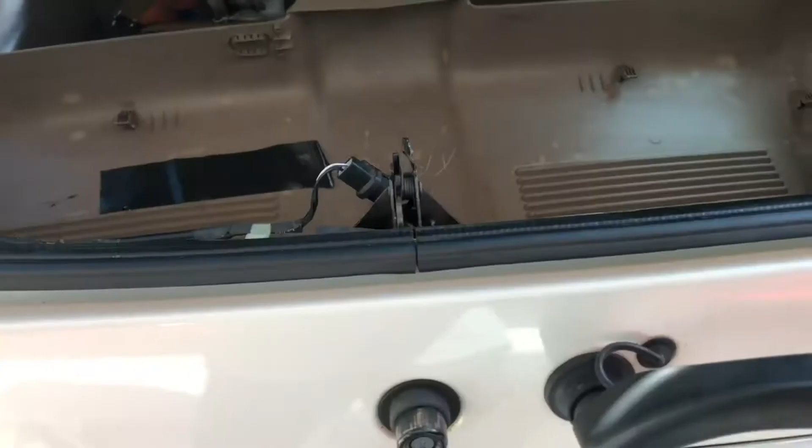This is a 2000 Ford Explorer with the rear latch. Zoom out so you can see where I'm at. And the rear latch just doesn't work at all. So what we've done, we've taken off the back piece of trim, and let me show you.

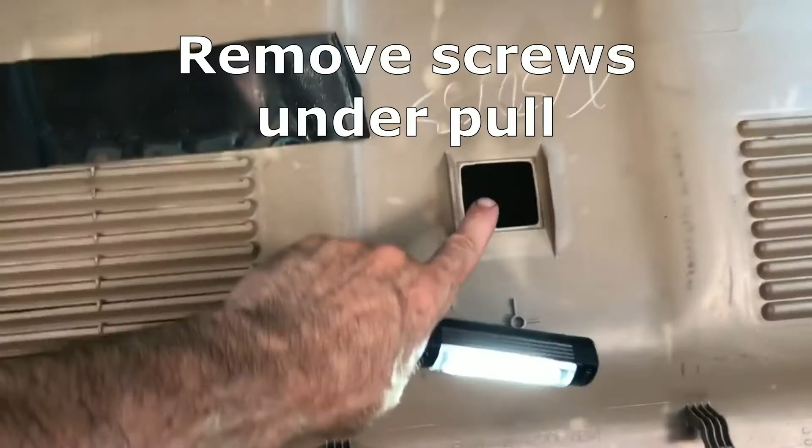There's clips in the top of it, so you can just pull the top out. Okay, and then you have to lift up. Oh, first you got to take these screws out. There's a pull, and you can see some screws on the back side of that. So you take those out, and then you lift up. So see these little guides right there. So you have to lift this up that way to get it off.

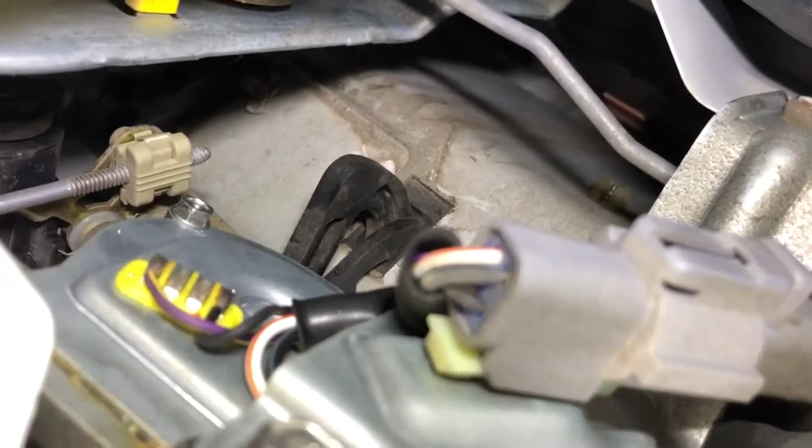Okay, so now that that is off, you expose the back. This is an upside down view of it. And okay, so now there's two sides to this thing. This is the side that's easier to see through this hole. It really doesn't focus. That one doesn't do anything, but there's a twin. The one you can see that's right in the middle of the screen. It's in focus now. That one doesn't do anything.

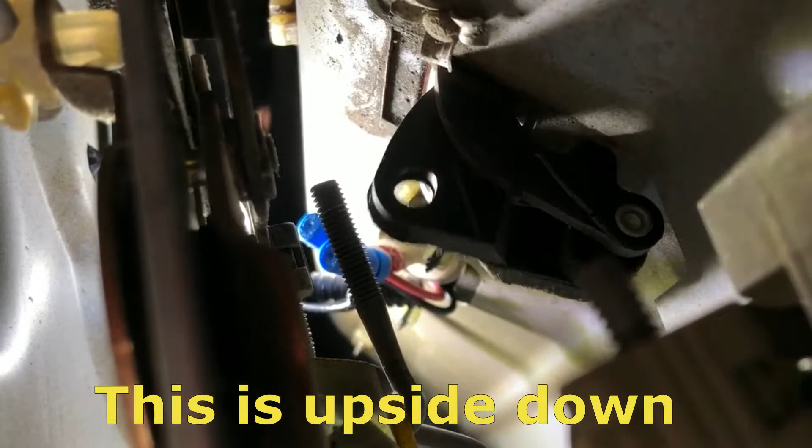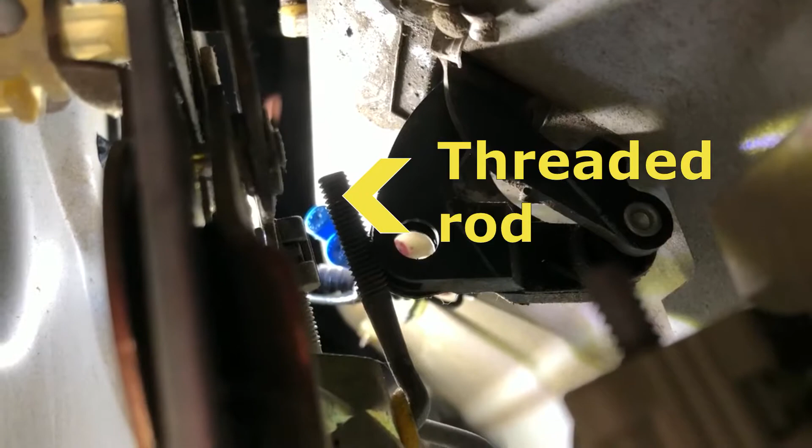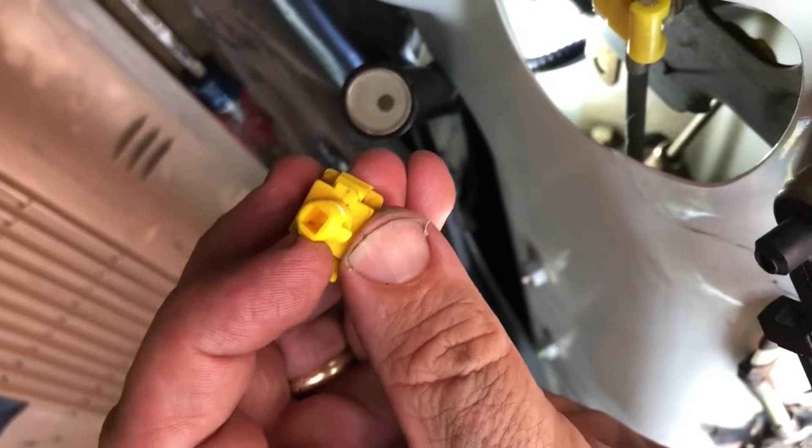The important one is on the other side, and it's right there. I'm going to try to put it mostly in the center of the screen. Aha! Okay, so that's the problem right there. Now you see right behind there, right where that black thing appears to be touching it, that is a threaded rod. Now on that threaded rod fits this piece of plastic. And the threaded rod goes right through there, and then this goes through the hole on the thing you see moving right there.

That's the pull. Okay, excuse the noise, it's really hot. I've got the fan running.

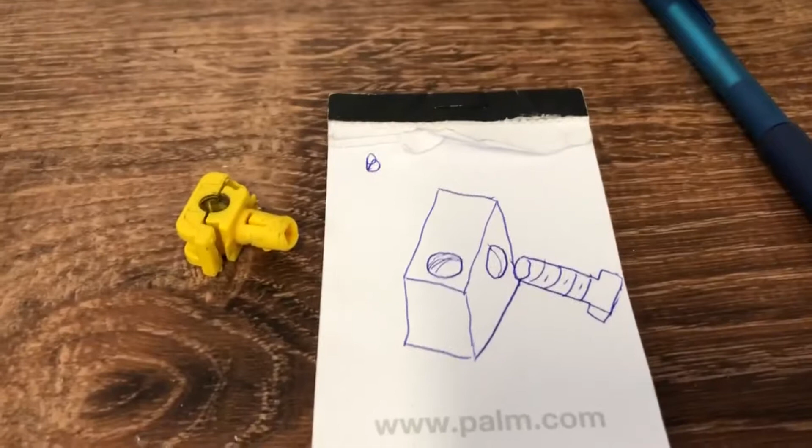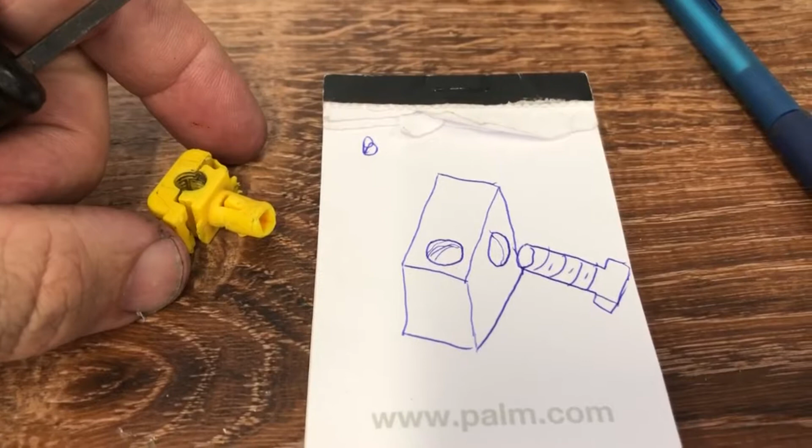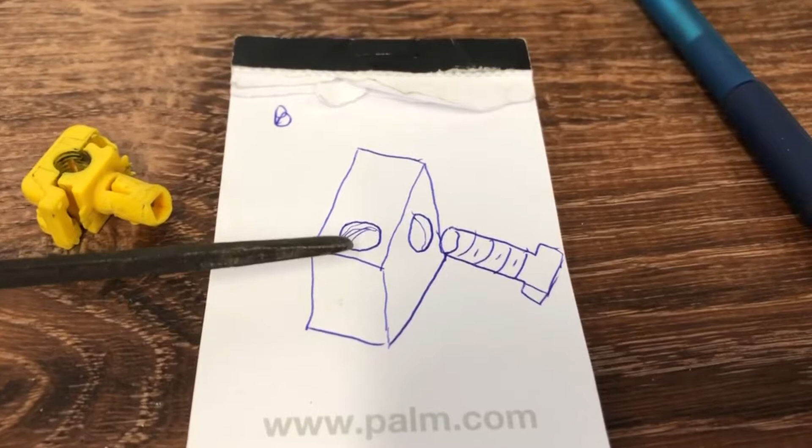So I don't think I can buy one of these from the Ford place. I think they want to sell me a lot of stuff with it, like a whole kit. So what I'm thinking about doing is just maybe making a piece like this, where this might be plastic or aluminum, and I can find out what size thread that is. That's an M6 by 1, by the way. So it's a metric 6mm, 1 thread per millimeter, pretty standard size.

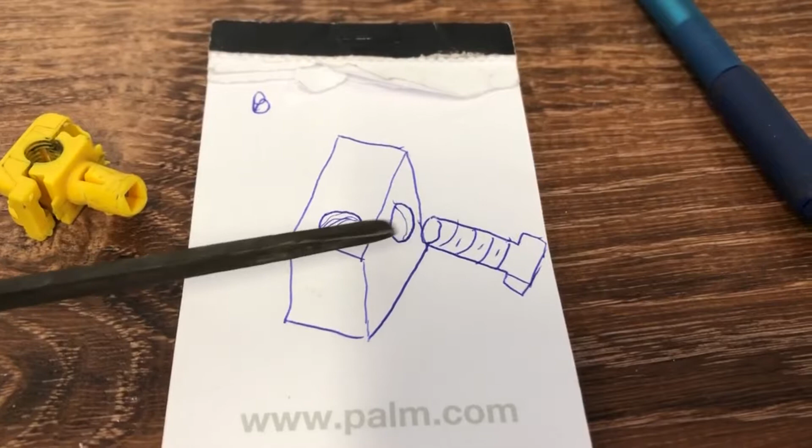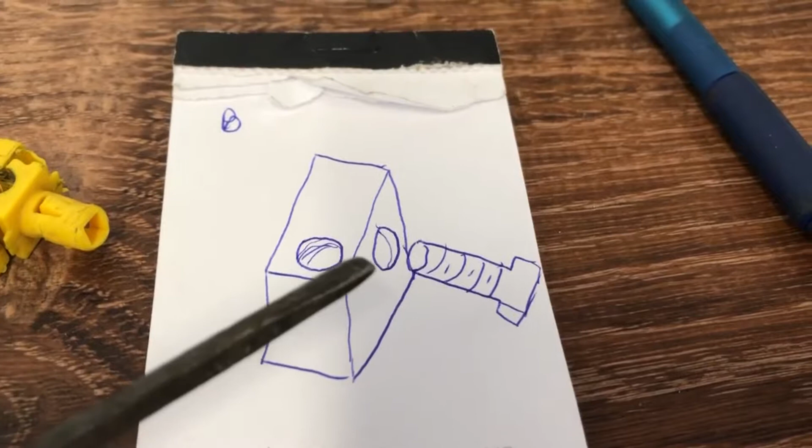And so if I get a piece of plastic, maybe I can just tap this with the M6. My hand is shaking. And then actually just use a screw to put through that black thing you saw moving, and then latch into this. There's plenty of room in there to make this part bigger than the original yellow piece. So it shouldn't be a problem.

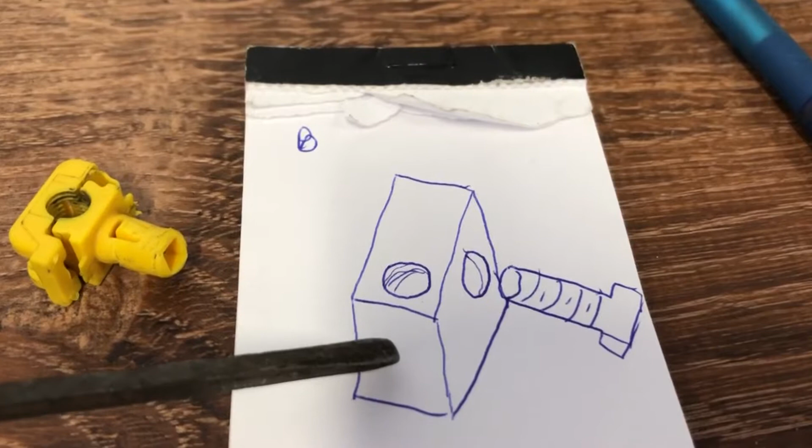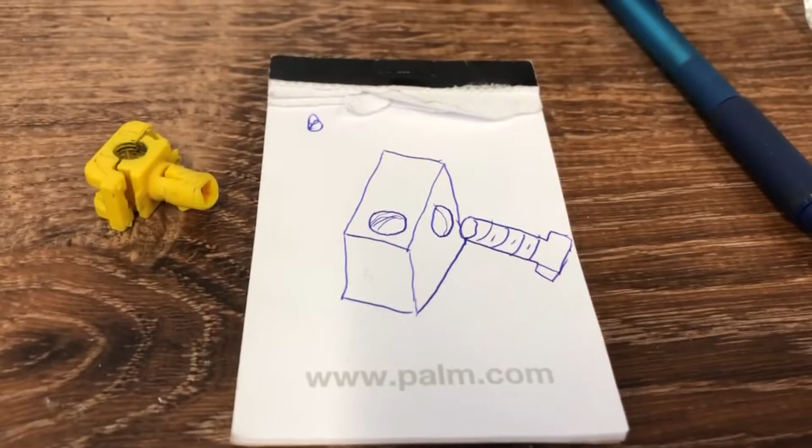I've got some plastic that would be good for this, but I don't really have a great saw to cut it. So I went to Lowe's, and I found this aluminum bar. It's not quite thick enough, but I think I can cut it and thread 2 of these together, basically to make something like this. And so what I'm going to do is basically mark off about the right length of this.

Excuse my dirty hands, I've been changing oil.

And I have a chop saw, so we can just cut this, there's no problem. And then I got a 6mm drill and tap, $8 from Lowe's. And I got some variety of stainless M6 screws, hex head, and some nuts. I'm not really sure which ones I need, but I'm pretty sure that'll do what I need to do. So I'm going to go cut these a little bit, cut off 2 pieces and see if I can stack them together, maybe screw them together and make something similar to this.

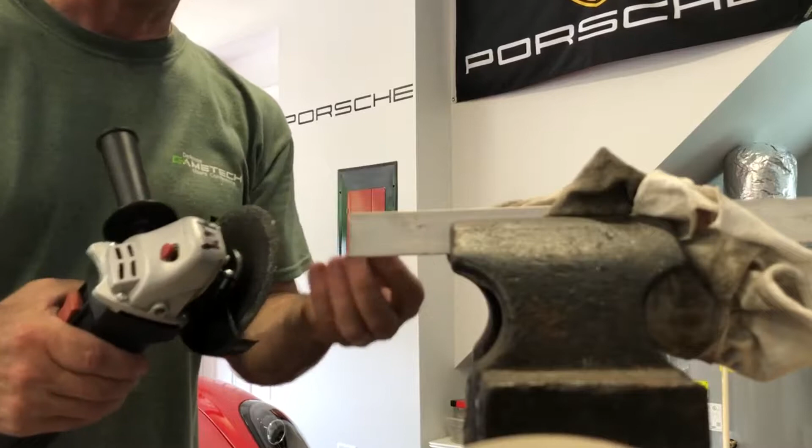So I've already cut one piece, and I'm just using a manual saw, which is not the best, but it'll do. The little bad boy is hot. We'll put it under some water, and I'll clean off the edges and sand these things down to fit together, and then we'll see what we can do with them.

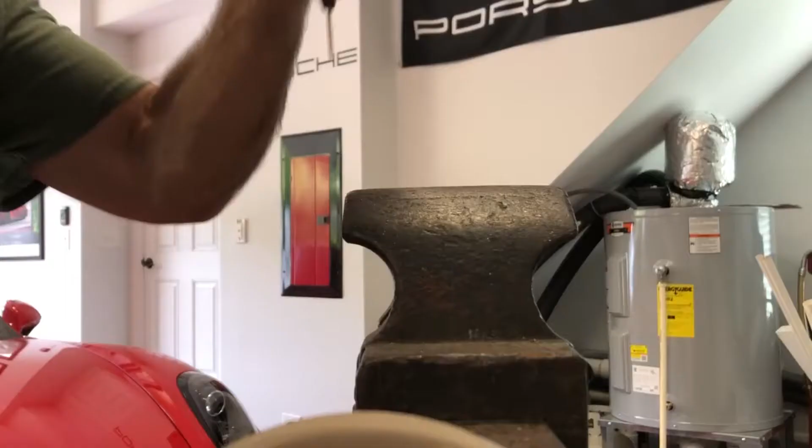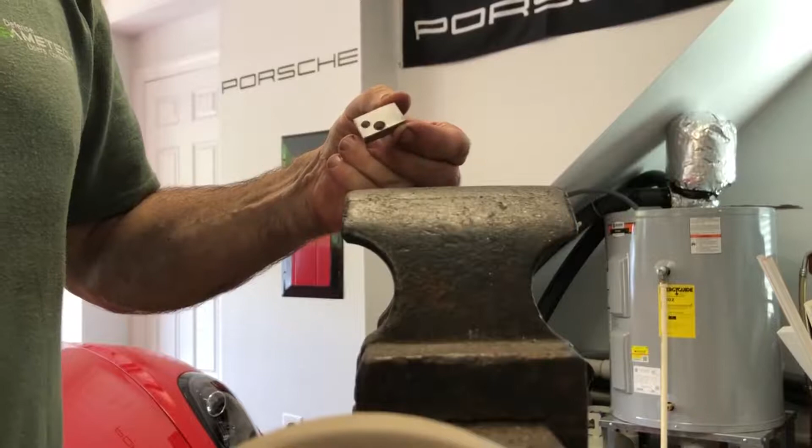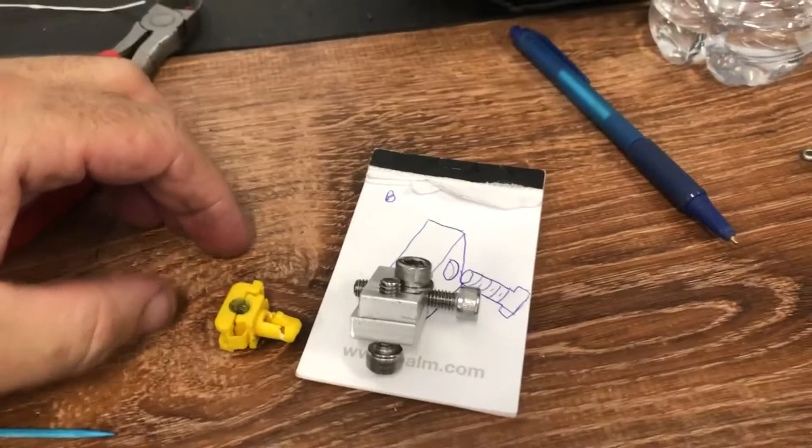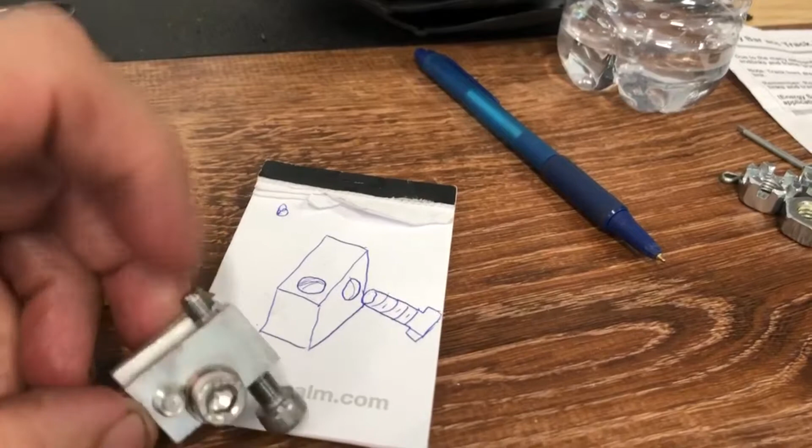Okay, so let's go over this one more time. So this is the original part, and I said I was going to make something kind of like that right there. So this is it. Now ignore this screw here, because all that's doing is holding these two blocks together. So the threaded rod in the car is going to come through here, and then this screw, I'm going to insert it through the block thing.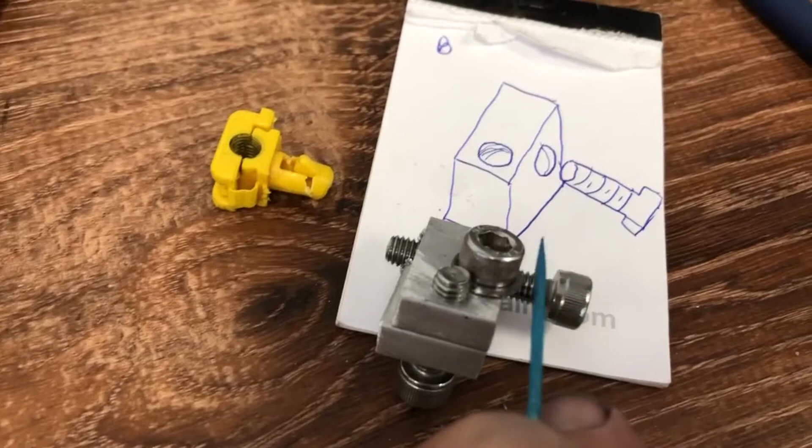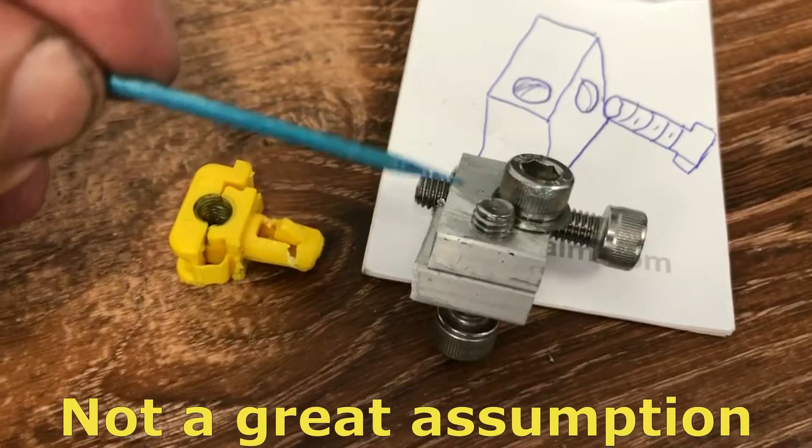So the black thing is going to be sitting right here, and so when that rod moves, then it moves the black thing as well, which is the same principle that this thing used. The rod is floppy, so I'm not really worried about the differences in dimensions here. I think there's enough slop in the system to take care of that. So let's see if it fits.

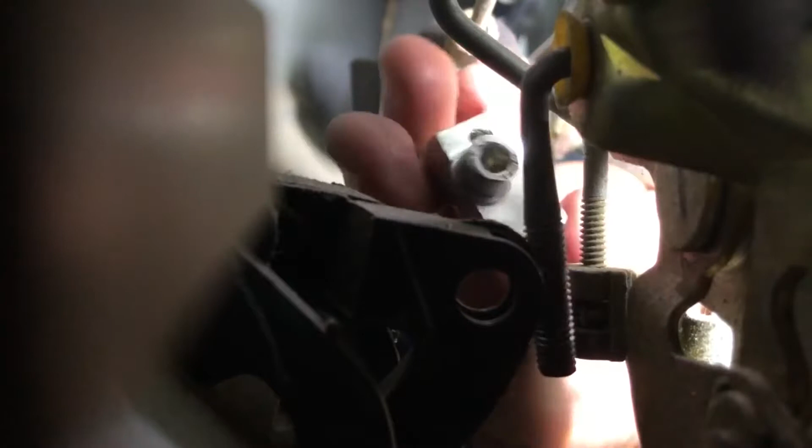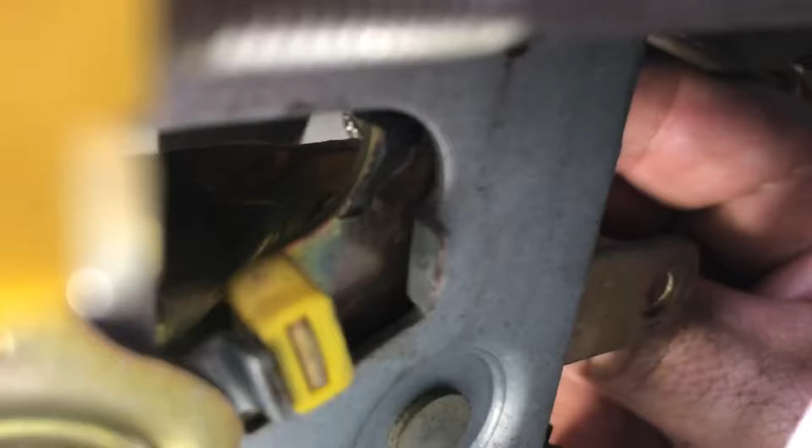A lot of things seem virtually impossible when you start to do them. Like this. I mean, with one hand, what are the chances I can thread that thing in here? But you just got to keep trying. Okay. It really wasn't hard to get it on there. I just had to get to where I could see it. Let's see.

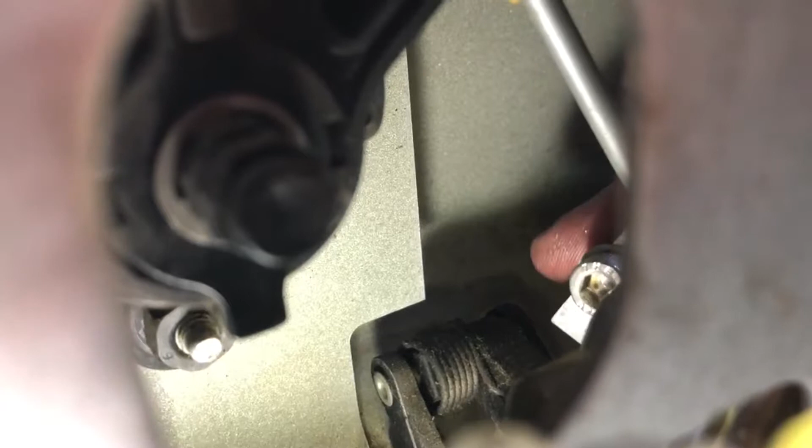Okay, so see the threaded rod? Boy, you can barely see it, but I'm turning it and it's threaded onto that rod. So I'm actually sitting on the bumper and closed the tailgate on myself. Let's see if I can see. Oh, what a beautiful angle. Oh, there it is. Okay, so it's threaded on there far enough.

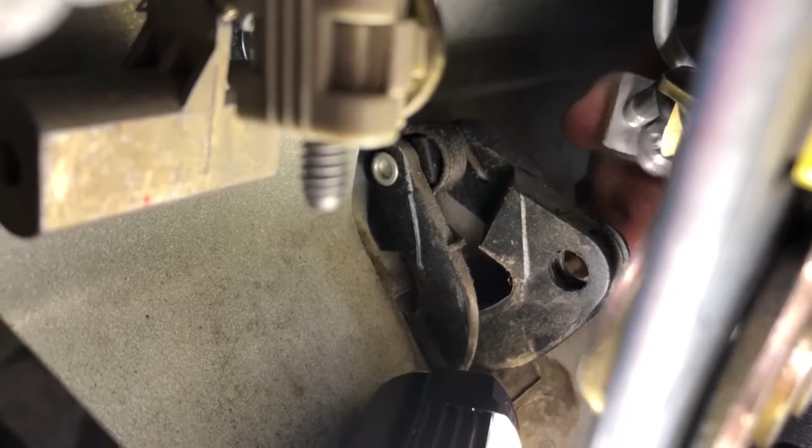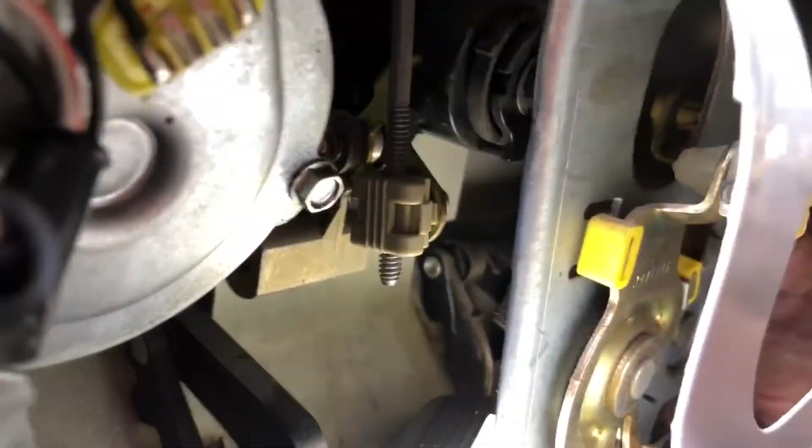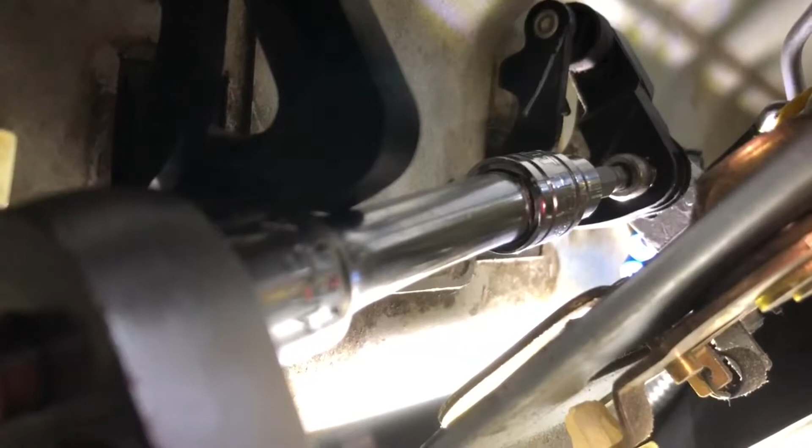And now step 2 is to get a screw through that hole my thumb is pointing to right there, and screwed into the side of this thing. Okay, I do not recommend this to anybody. This has taken way too long. I've had to rework that little piece a couple times, put more holes in it.

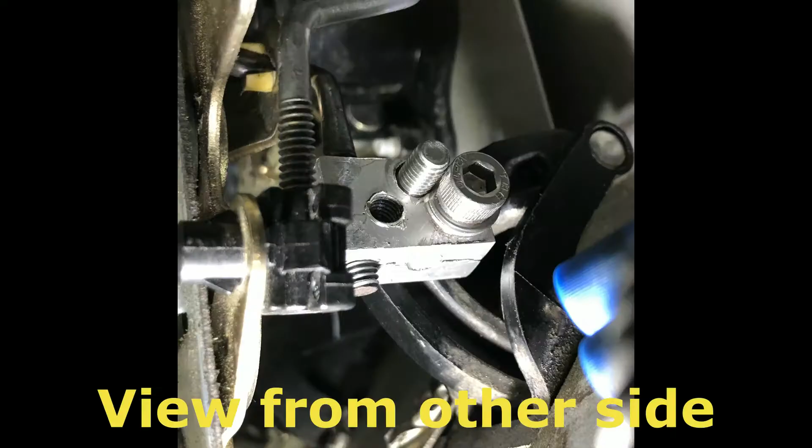Here's the threaded rod, and here's the aluminum piece, so it's going into the aluminum piece. And then I've got this Allen head screw right there, going through the black thing into that aluminum part. So it's sort of mocking up that yellow piece. I'm just going to finish tightening it up and then try it. We can check out the functionality. Seems to work pretty well.

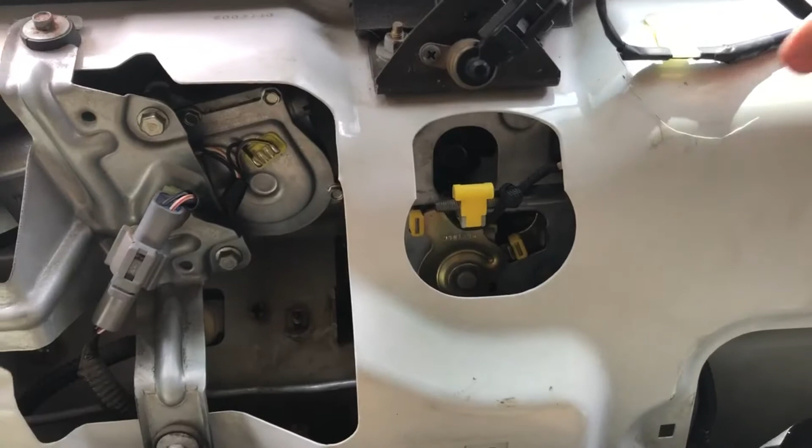One thing we did figure out, since this thing has been broken so long, if you have this window opening feature, then what you can do, if I move the camera around, here's the mechanism that opens the hatch. So if you pull the handle, that's what happens. Or if you pull the string, it also will open the door.

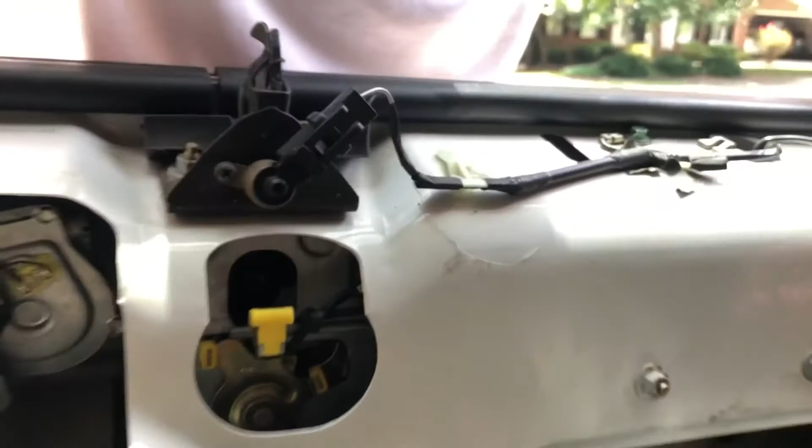So what we're going to do is cut a hole in the trim for the string to go through as a backup plan in case the little part that we just put on there fails. So we can still open the entire hatch by opening the window and then pulling on the string.

If I had it to do all over again, which I might potentially do, but not anytime soon, here's what I would do. I would go find a piece of aluminum 3/8 inch wide and get it about a 1/2 inch deep.

And the height doesn't really matter all that much. My bad assumption was that I had plenty of real estate to work with, and that I could sort of move the piece at will to line up with the hole in the latch. Well, that wasn't really all that true. So here's what I would do.

I would get this piece of aluminum about like this and drill and tap this hole in it and go ahead and screw it on without a second hole in it. And actually I did this, I didn't show it in the video, but I did this with the part I made. And just get a Sharpie or something and you can go install this thing.

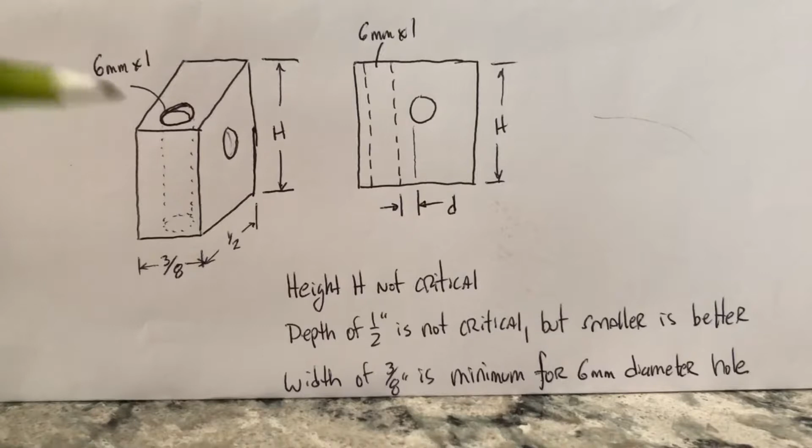So remember, the threaded rod goes through here, the rod of the car. And then just push it up against the black lever and mark on here on this back face where the hole should go. And that'll be a lot easier. And you just do it one time.

And so the 1/2 inch here, I've got some notes here. So I don't think this height is critical. I think you got a lot of space in that direction. It's not really that important. But the 1/2 inch is important because it starts getting in the way of the latch itself.

The latch, if this piece is too long, that black thing actually has a little jog in it, and this edge starts to come into play. And so you keep this about a 1/2 inch. Actually, this could be thicker as well. The 3/8 is a minimum, so it could be a 1/2 by a 1/2.

I think the only other thing is that this could be a through hole right here. So if you do that, then you can just put a screw through and put a nut on it. A lock nut or something like that would be fine. Or, since you got to tap this thing anyway, you really don't have much choice there. Just go ahead and do this one as well. And then put a screw through here and maybe put a nut on the back side.

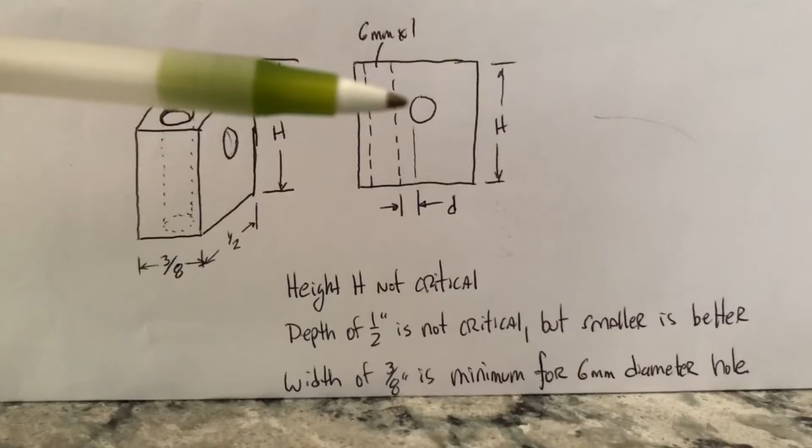If you saw the configuration, I actually had no nut on the back side because I was holding the two pieces together with another screw that was in the way. And so I ended up putting some caulk on there. Hopefully it won't back out. But if it does, I've got the string on there as plan B. So I don't think the height is critical.

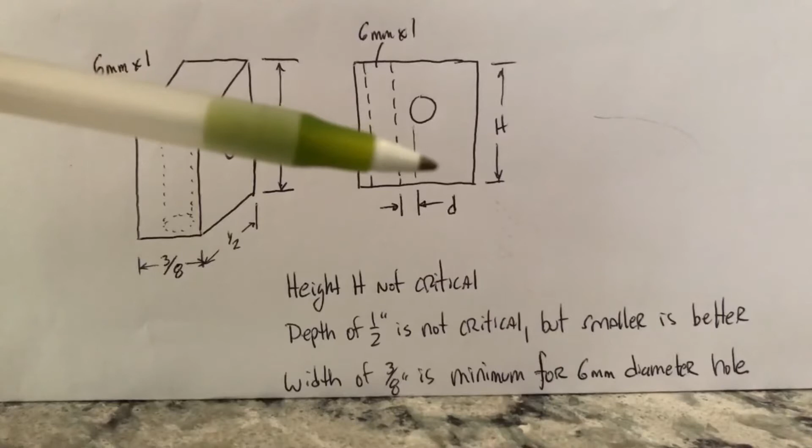If you have two pieces like I did, what I would do again is make this as long as you need it to be, and put the 1 or 2 screws somewhere down here out of the way that clamp the two pieces together. So I would use smaller ones. I'd just get like a 3mm tap or something like that.

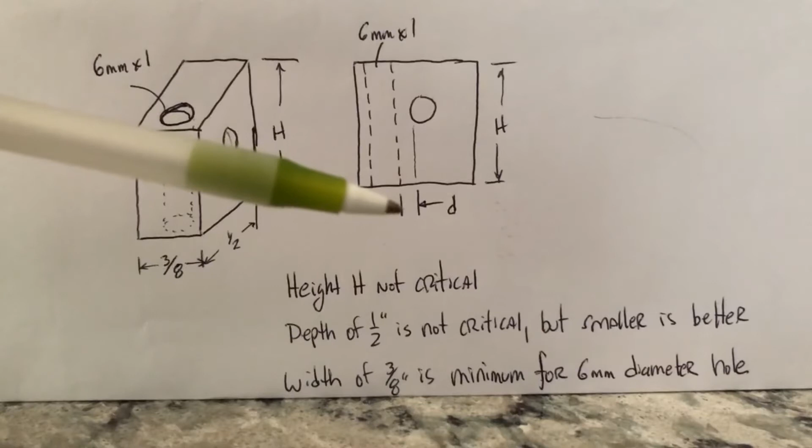It's important though that this hole not intersect this hole, these threads where the threaded rod is going to be screwed into. So you got to have some distance here, D, that's not 0. Something small would be fine. But those two things just can't intersect. So I think that about covers it all.

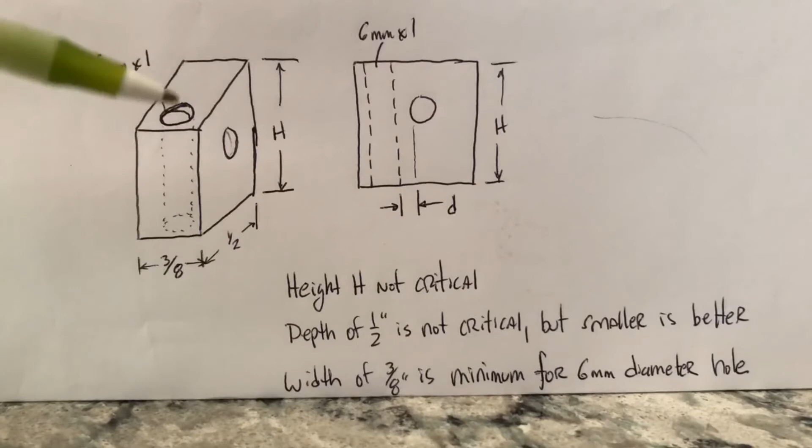So if any of you guys want to try this, definitely don't just build it and hope that it works. I would start with something like this. And actually it's not too hard. I installed and uninstalled my part on the threaded rod probably 5 times. It seems like it's going to be really hard to get going, but actually you just work it and you can get it.

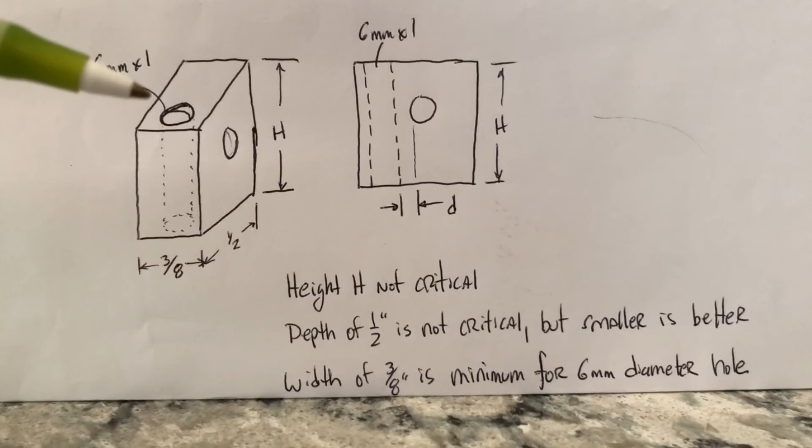Now if your hands are super big, that may be a whole different story. It's going to be a lot more difficult. I probably have medium-sized hands, and so I can fit them in there okay. But if you have big hands, it's going to be almost impossible, I think. But anyway, that's my recommendation for how I would do it next time.